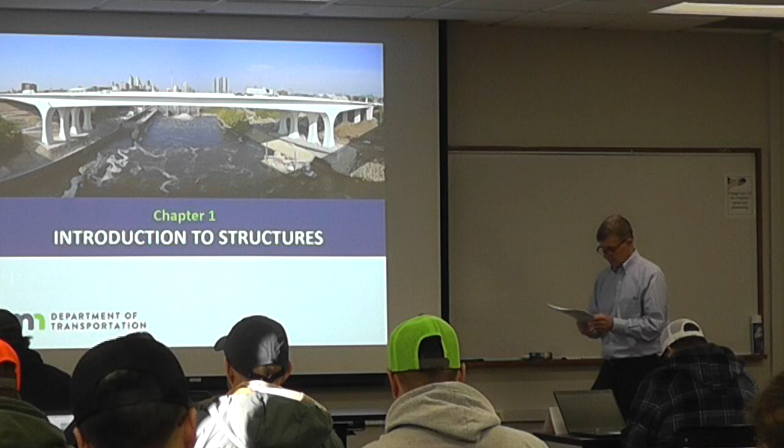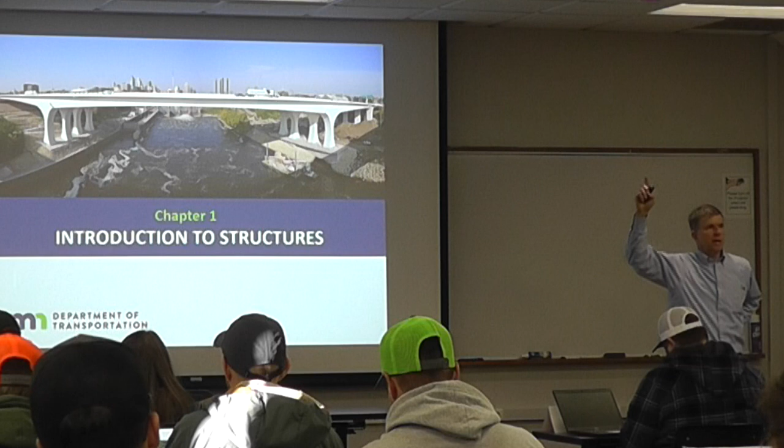Okay, so let's look at structures. So before we start going into here, who would give me a definition of a structure? Just throw anything out. There's all kinds of things that are right. What's a structure? Load-bearing component that's based on foundation? Load-bearing component based on foundation. We can probably write that up here for every class.

That's good. So it's bearing a load. It means it's carrying something. It's carrying a load. Another word for load might be weight. So we're looking at weight. We're building something that's going to carry weight from here to that, oftentimes over nothing or soft ground. There's bridges that are actually built on, we call them land bridges. They're essentially built over a swamp. Instead of digging out 50 feet of muck, build a low-level bridge right on top of the swamp.

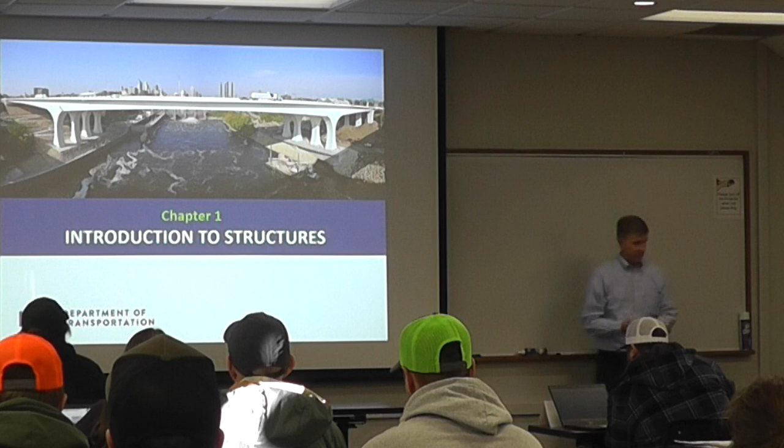So structures can be many different things. We're obviously going to concentrate on vehicular bridges here in this class, but structures also are things like carrying pipes, maybe a water main over a highway, or different things like that. Structures also are maybe tanks containing water. That's all structures. Structures are buildings. People live in them. So structures have many different definitions.

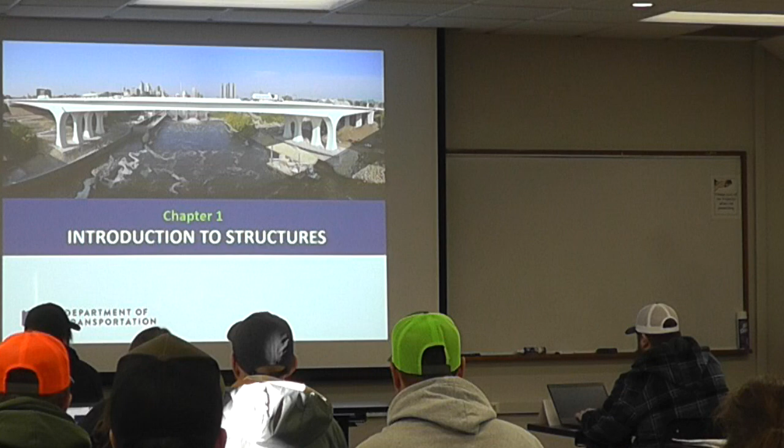Get this fixed, because there should be no way this thing goes to sleep in a 2-minute break. Just got to push enough buttons again.

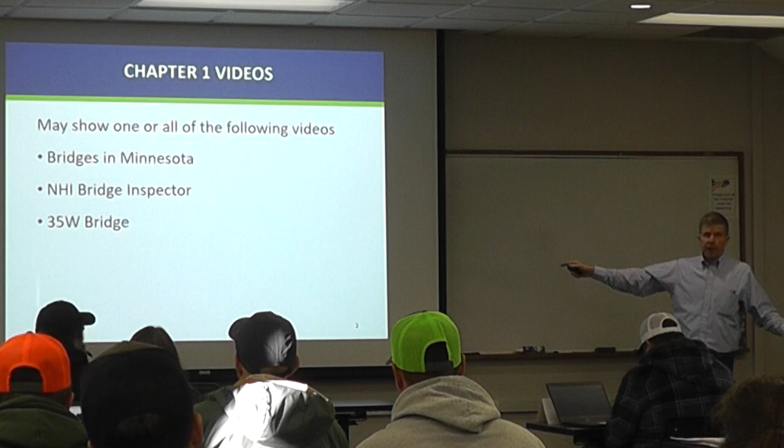There's several videos available on the Bridge Office website. We are going to show the next presentation after another morning break. We're going to show one on the 35W collapse and rebuild. We're also going to show videos on bridge deck construction. We're going to have some videos that Andy will share on bridge piling. A lot of times videos can help us learn, and so we're going to have a couple different ones.

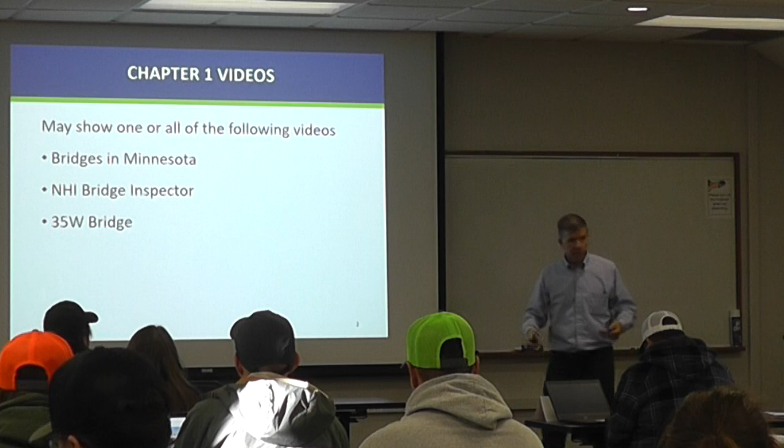In a 2-week time period, we're trying to make it so that there's a couple different learning things that you as students can go through. Some people are okay with learning the way we're doing right now. Other people learn better by watching a video. Other people would be better doing dialogue. And so we're going to have some of each. We're going to look in the bridge plan. Where do you find, what's the information you have?

So our agenda for this chapter 1 is looking at bridge types, elements, and spans. We're looking at some contract definitions of things like who's an engineer, who's an inspector, what do different things mean, what are the roles of each. We're going to look at some of the basics of bridge design, and we're going to look at design and construction loads.

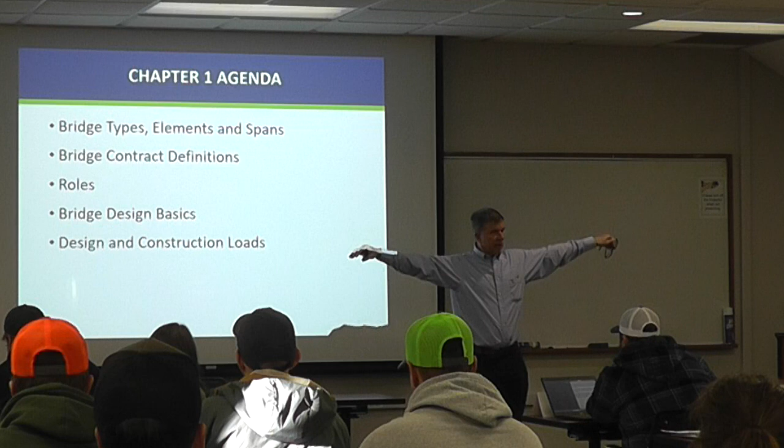And this lowest one here, design and construction loads: when we design a bridge, we're designing it so that it'll carry the vehicle, the loaded semi, the wind, the braking forces, whatever is on that bridge. But also, as you're building, you have to consider that. So the St. Croix Bridge, for instance, was built in cantilever construction. That means we started from a pier or a pylon, and we went out a segment at a time until eventually we were sitting out there 300 feet balancing. 600-foot span, 300 from each pier.

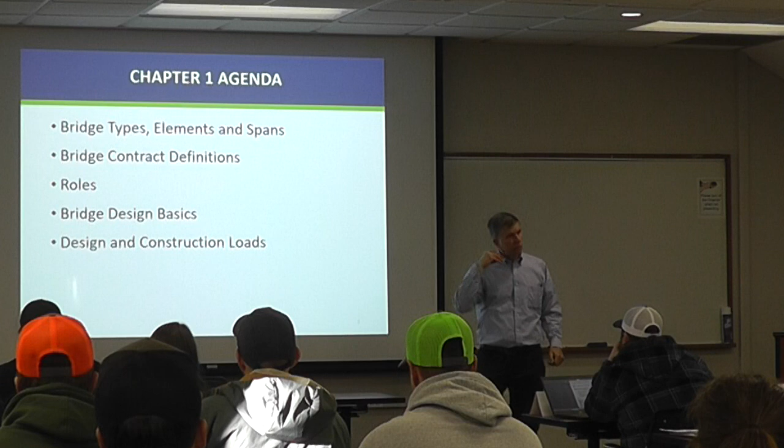That was actually the highest loads that that bridge will ever experience. Because once you tie it together, it becomes continuous and the load path changes. And so I also want you guys to be thinking about what is the load during construction? And as we're building forms and falsework, what kind of things do we need to be concerned about?

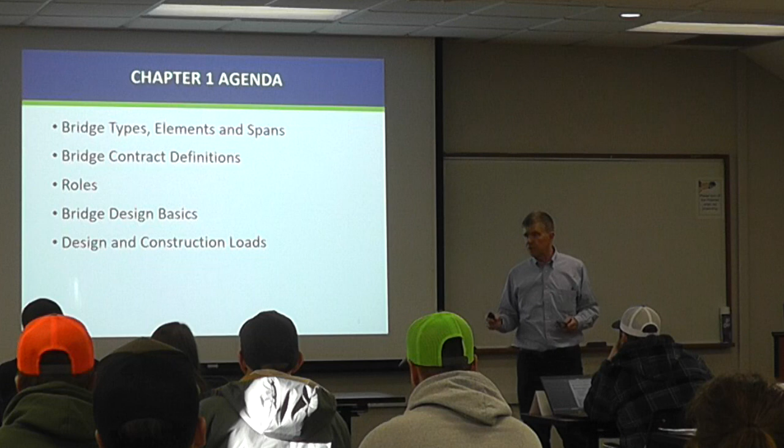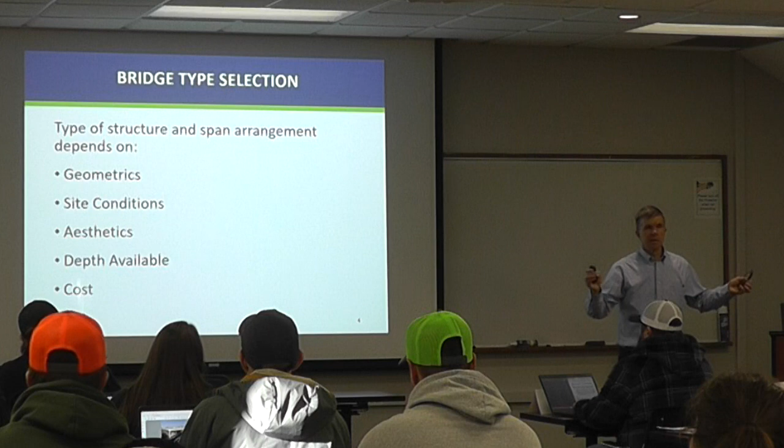So the type of structure and span arrangement depends on many different things: geometrics, site, aesthetics, depth available, and cost. If we're talking about geometrics, what kind of a geometric feature might make a difference in the type of bridge? So one way is straight or narrow. What's another geometric? A curve.

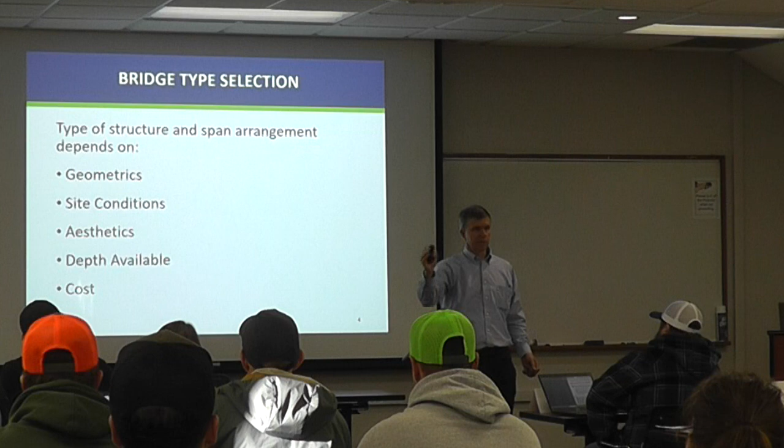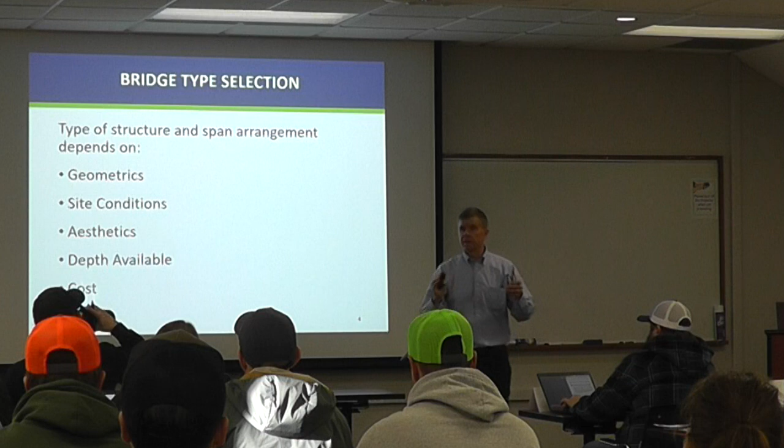Pre-stressed concrete girders can't be curved. They're straight lines. Steel girders can be curved. And so if you have a pretty tight curve, you're going to have a steel bridge. Now, if it's a gentle curve, and we've perhaps seen a lot of them, you vary that deck overhang a little bit. So maybe at the pier it's 3 feet, and out at the center of the span it's 1 foot. It can accommodate some curve. But if you have a real tight radius, you're not going to accommodate it. So you need to go to steel. So that's one thing for geometrics.

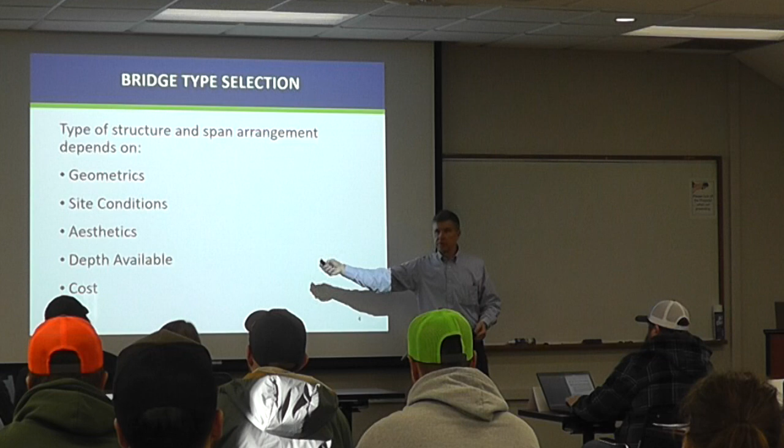Site conditions. You're over land, you're over water, you're over railroad. Maybe there's some access concerns. Maybe you've got to then make a longer span. And so that can depend on the site condition. Aesthetics. St. Croix, to use that as an example, was a thing where the concrete box girders are even different than a lot of them. And everything is rounded corners. You couldn't do that with a steel member so easily. And so, that all comes in.

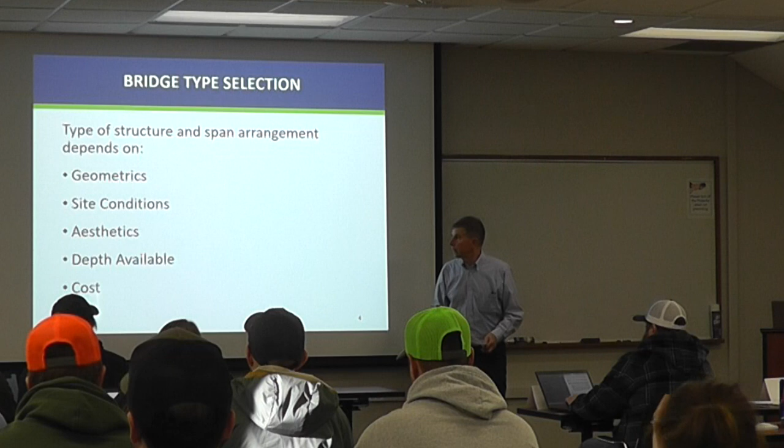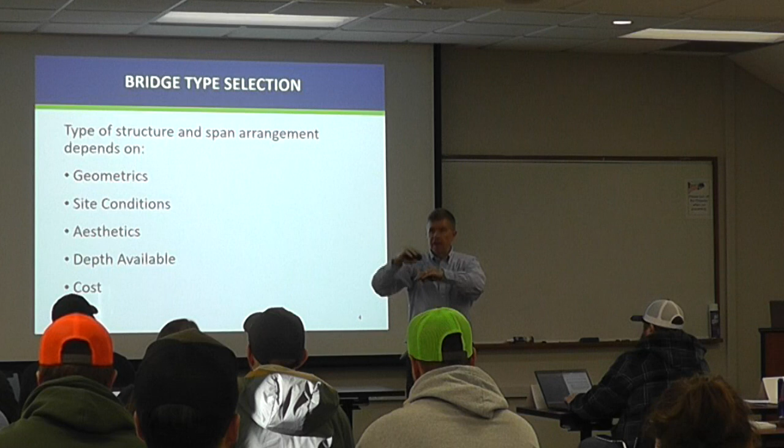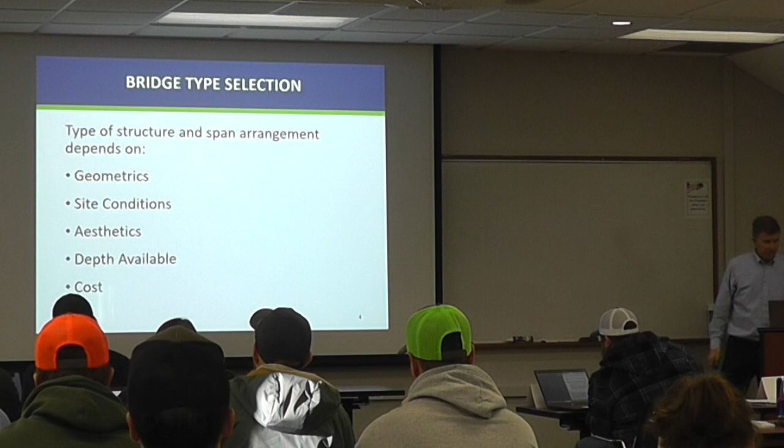Depth available. If you have a highway over highway, but you only have 20 feet to play with, you need 16'4" of vertical clearance. That means you only have, say, 3'8". Well, you're going to have probably a little skinny steel beam maybe instead of a deeper concrete beam. And so depth available matters, and obviously cost always matters. So those are all things that make a difference.

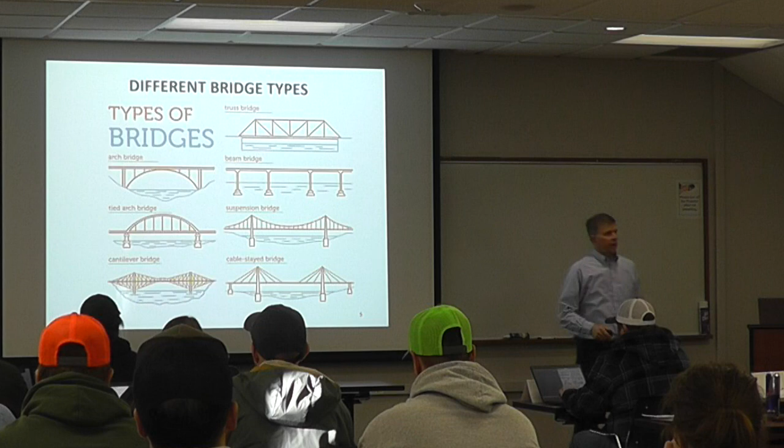Tied arch, so Hastings, those of you who have ever been down in Hastings, the new Highway 61 bridge, it's this method. A suspension bridge is one where there's some taller towers, and then there are cables supporting it with some hangers. Cantilever bridge, this is an old picture, a diagram of the Forth Bridge in Scotland. Cable stay, the towers come higher, the cables come down. Right now, preliminary engineering for the new Blatnik replacement is looking at a cable stay bridge and a tied arch bridge for the main channel. So there are a lot of different examples here of type of bridges that we have.

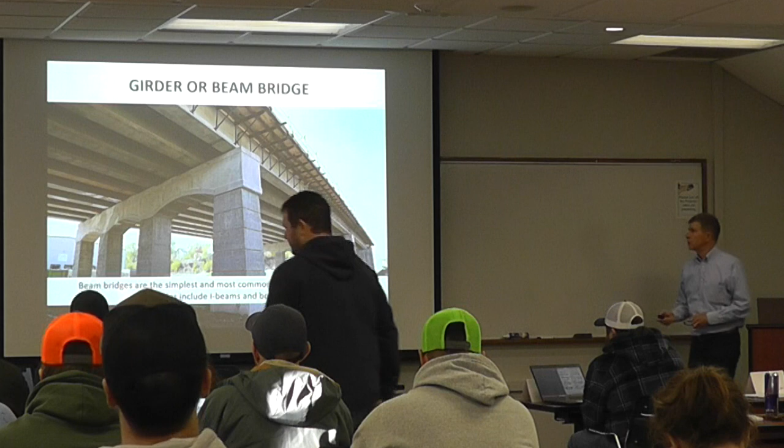So pictorially, here is a picture of a girder or a beam bridge. So the girders are going along here from pier to pier. So in this case, it's a concrete girder. And also, I'll just mention this terminology, girder or beam. Is there a difference? They're pretty interchangeable. If it's a system that has girders with floor beams tying in, then it's a little different terminology. The girders are the main elements. But oftentimes we may hear pre-stressed girders, and by the same token, we can hear pre-stressed beams. So it's not any marked difference there.

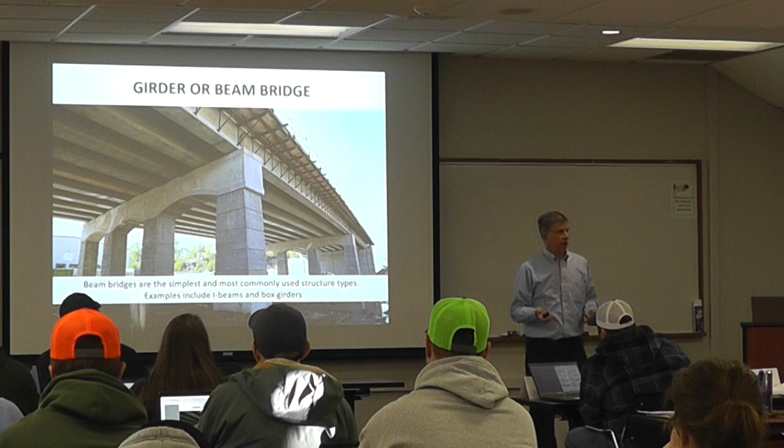Beam bridges are the simplest, most commonly used structure type. They are what we use. As far as material, I don't remember if I have it in this slide. Pre-stressed concrete that looks like this right now is roughly 80% of the bridges that MnDOT puts up in a new configuration. That leaves 20% for steel or perhaps a few others. In the MnDOT system, they really don't build much timber, but 80% is roughly pre-stressed concrete.

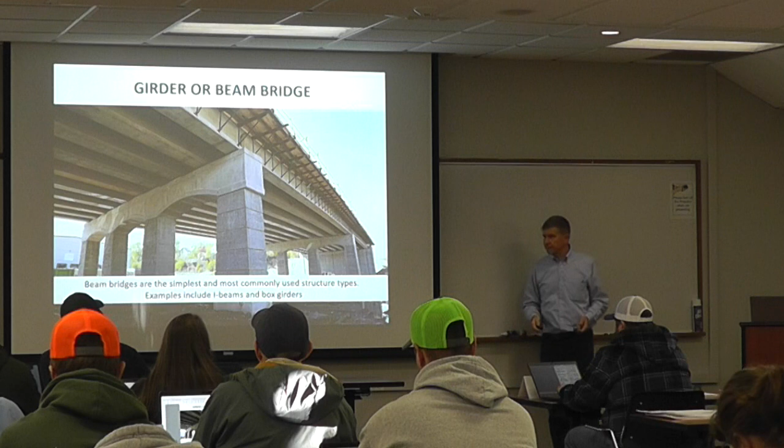So here's another picture, just a simple basic bridge over a stream, a couple of piers, one on either side of the channel, river, and then abutment up on the slope. Little pre-stressed girders or beams that are coming across with a concrete railing and a concrete deck. So again, very, very standard type of bridge that we would see here.

Beams are limited by their standard depths and shape. There's a little diagram in the bridge design manual that shows if we have a 50-foot span, what depth of beam would we need, depth being this dimension. If we go to 100 feet, obviously it takes a little bit stronger of a beam, a little deeper, and so there's also a chart that would tell that. These pre-stressed beams can get up close to 200 feet, around 180, some of the deeper sections.

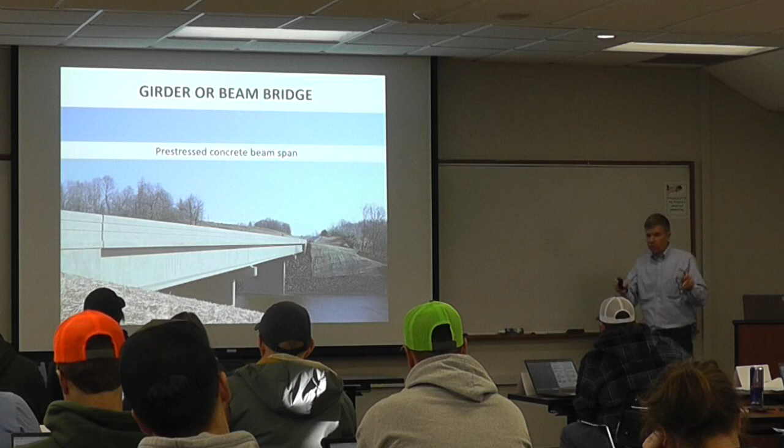And you can always stack a few beams a little bit closer to each other. We'll look at some of that when we get into the 27-138 bridge.

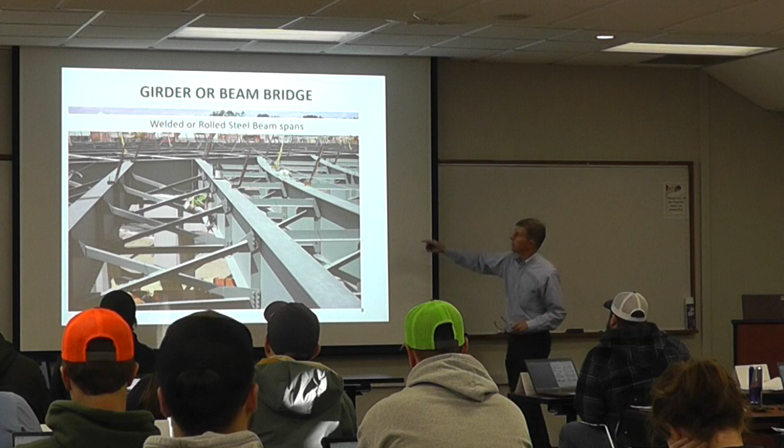This is a picture of one of the single point interchanges that we have in MnDOT. I think this is the Penn Avenue. Single point interchanges, the ramps come in and everybody is kind of crossing at the same place. There's a traffic light, stop the ramps, and then the ramps go. But in a configuration like this, there's no way pre-stressed girders would work.

But steel, you can frame steel into another member. So in this case, there's a girder going all the way from here, going across, and then all these little curved ones are coming in and framing in. So this is something that steel can accommodate. With pre-stress, you'd never be able to do that.

So here's just a picture of, in this case, a welded plate girder. Welded plate girders simply mean that there is a top flange, a bottom flange, and then a web. The web is this vertical piece. They're welded together in a fabrication shop, and then they come out to the site.

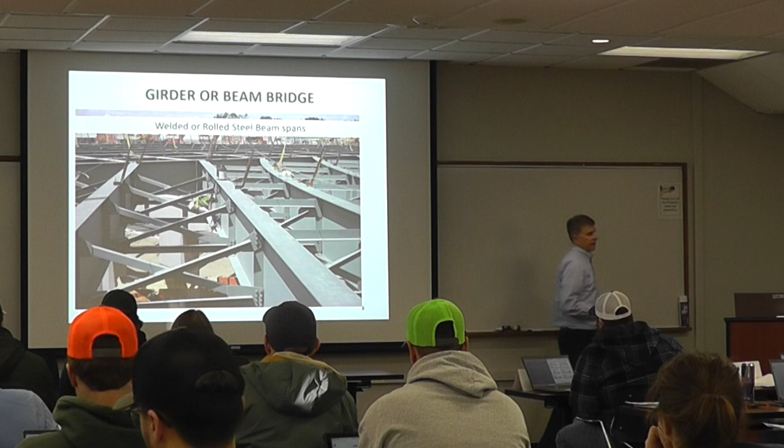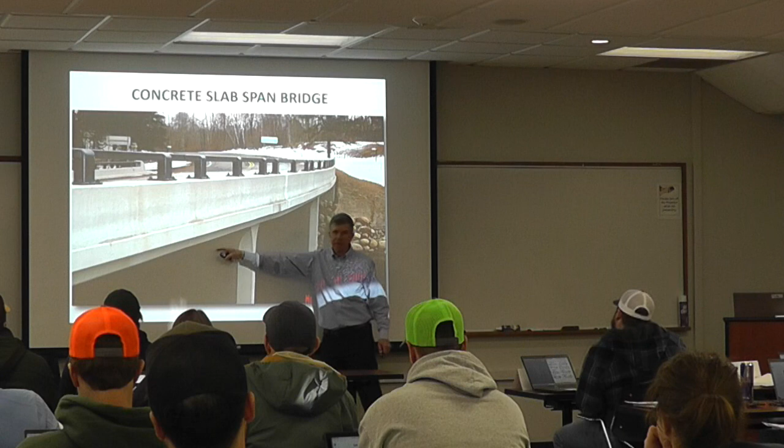They also do have the smaller beams, up to 36 inches, which are what they call rolled steel, and they come out of the rolling mill in the final configuration. So you might see both of those. Concrete slab span does not have a separate beam, but the slab gets a little bit thicker. Typically they would be 16, 18, 20, maybe 24 inches thick.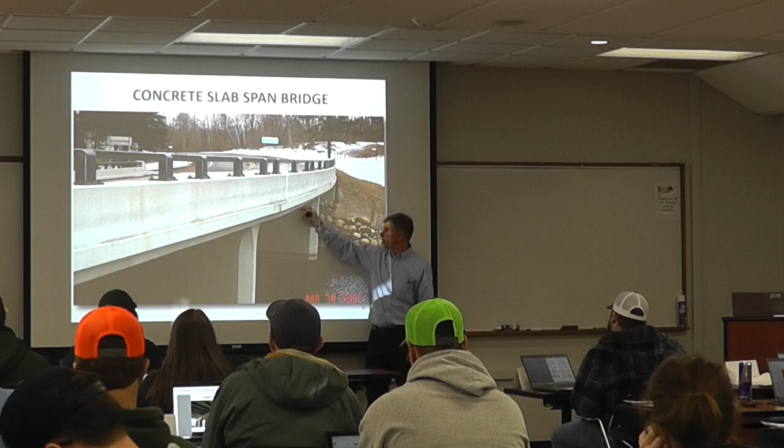The one thing, it's going to require more false work as you're constructing. Whereas a beam bridge, you build the piers, you put a beam across, and then you just have decking. But for a slab, you'd have to support it all the way across. So we're going to have a full session on forms and false work, and we'll talk about that a little bit more.

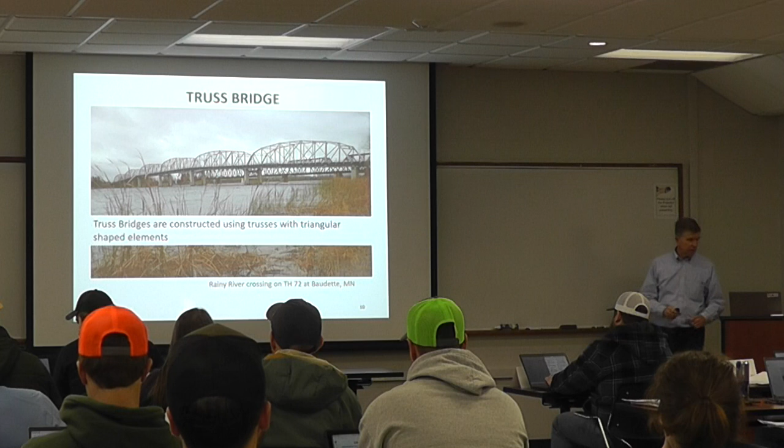Truss bridges always have triangular shaped elements. And their elements are always either just tension or just compression. Who can tell me what is a tension member? What is tension? What's it trying to do to the material? Trying to push it together or pull it apart? Tension is trying to pull it apart. Compression is trying to push it together.

We're going to talk more, I'll just briefly mention it here. Reinforced concrete combines concrete, which is strong in compression, with steel reinforcement bar, which is strong in tension. You put them together in a bending moment, and the reinforcement will take your tensile stresses. Your concrete will take your compression stresses.

These kind of bridges are all steel. It could be a concrete deck, but as far as the structural members, they're all steel. They're all in triangular patterns, and all of the loads will go such that each member is just in tension or in compression. And so that is how a truss works.

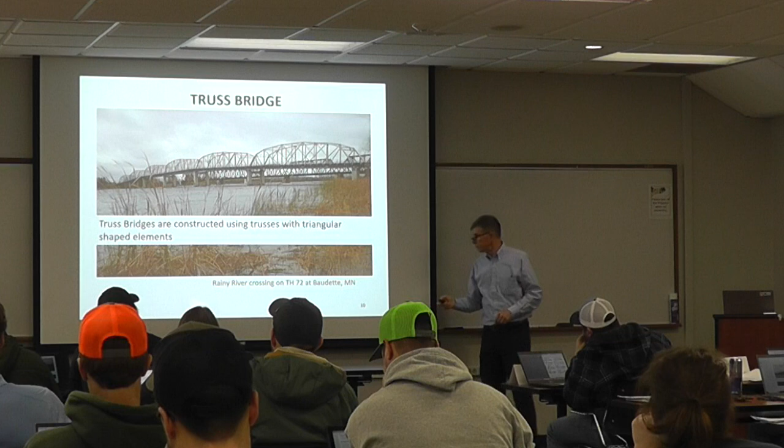So this is a picture of the Baudette bridge. Part of the problem with truss bridges is they have these portals that are sometimes fairly low above the roadway, and they get hit by high loads. So one of my jobs as Metro Region engineer was, it seemed like every couple times a year even, to go visit the Stillwater Lift Bridge, because high loads would come and damage a portal or one of the verticals or something.

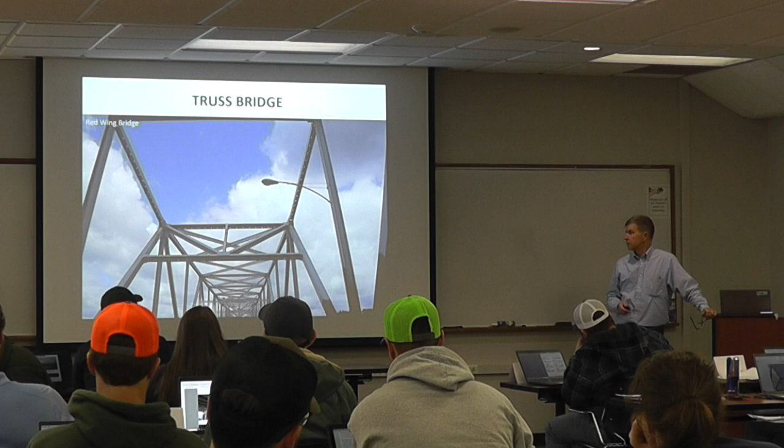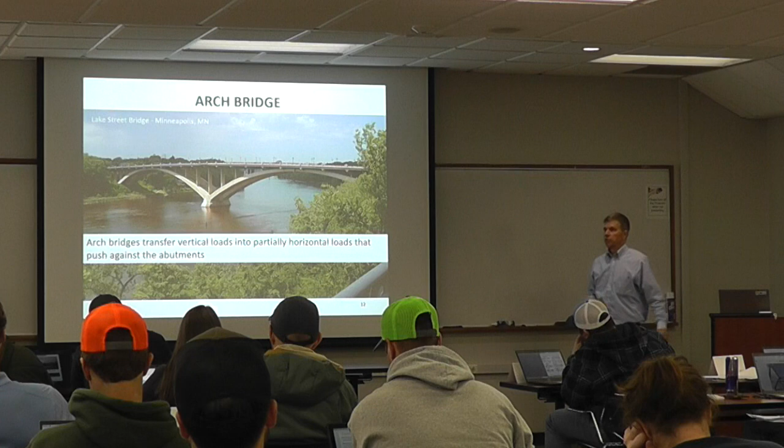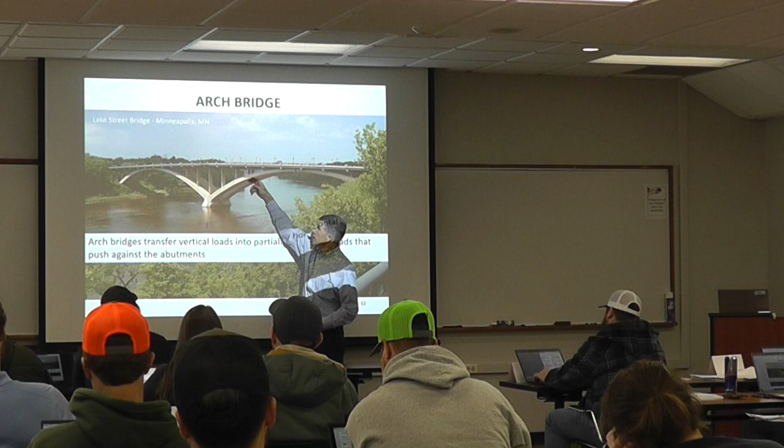So arch bridges transfer vertical loads into partially horizontal loads that push against the abutment. So without getting in too deep into statics, you get a load coming down here, it's a vertical load, but it's going to distribute because of the shape. Some will go horizontal, some load will stay vertical, and it'll keep working its way down.

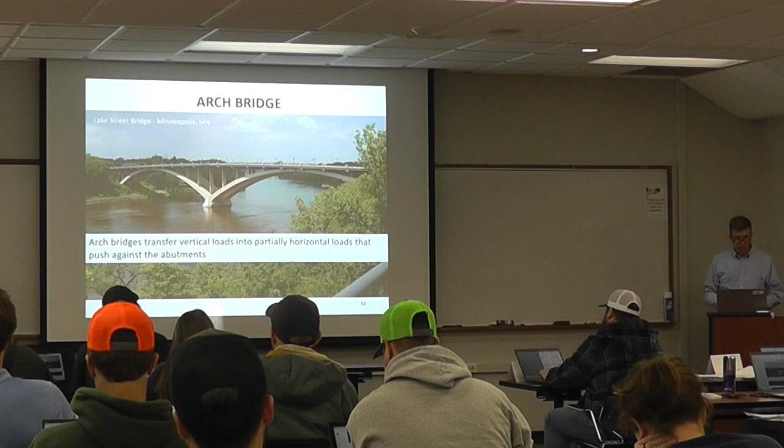But eventually, it is trying to push laterally. So those foundations have to be pretty stout to be able to resist those types of loads. So that's an arch bridge. That's the Lake Street Bridge in Minneapolis.

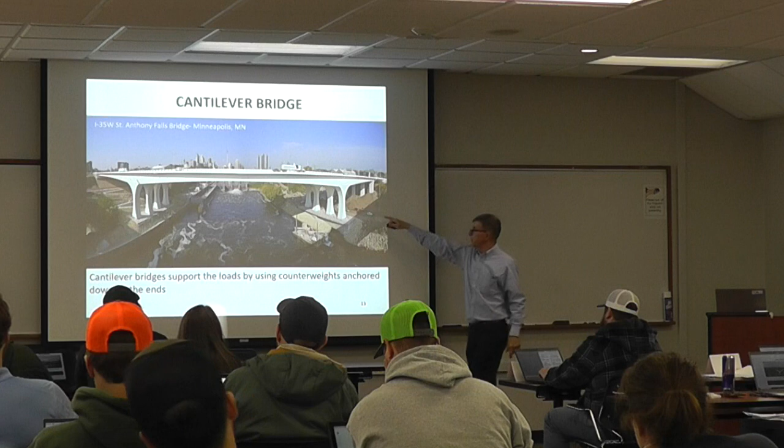Cantilever bridge, I mentioned St. Croix, we were about 300 feet each way. Likewise, the 35W, that we'll see a video of after break, they actually built this back span first. There was false work down here, and they built all this. So essentially it's like a big counterweight.

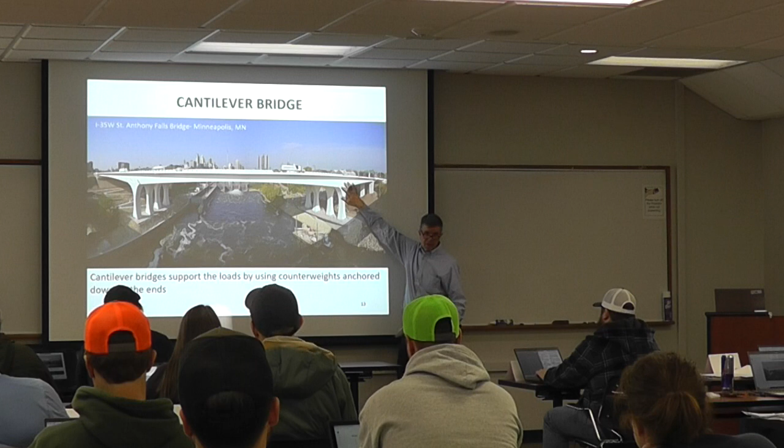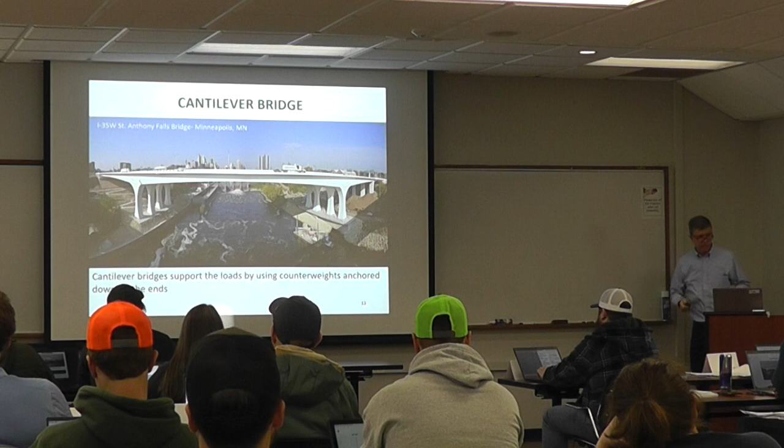And then each one of these segments was placed day after day after day. And it went out until they got out to the middle, and then they put it together. But each of these segments had to be tied back with post-tensioning to what had already been cast. So that's called a cantilever during construction, and it's a cantilever bridge in that way.

A cable stay bridge. So the picture for Minnesota is the Greenway Trail over Highway 55.

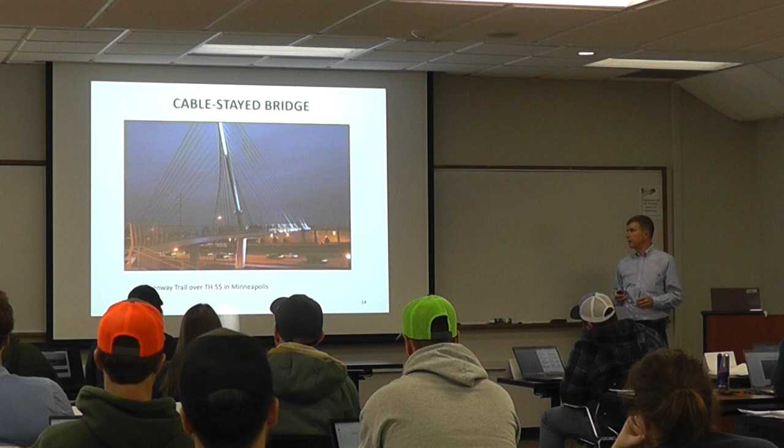They've recently had some issues with some of the connector brackets and stuff, I believe both up here and down here, for sure up at the tower. And so there's been cracking and stuff that they've had to figure out. But other more famous examples would be things like the Sunshine Skyway Bridge in Florida and so forth. So those are all the types of cable stay bridges.

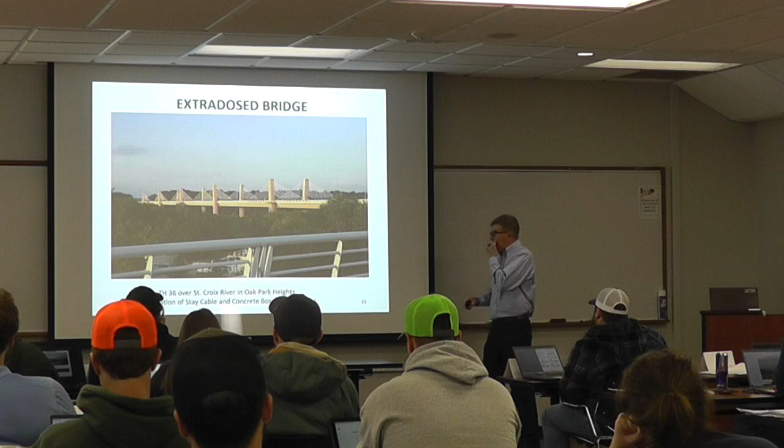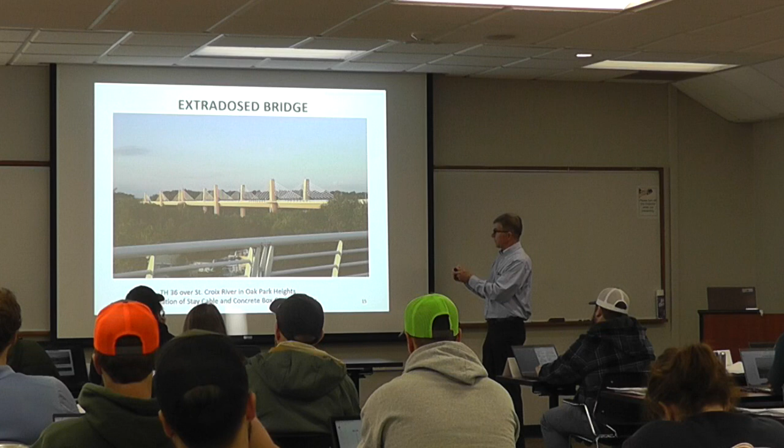Extradosed bridge, I hadn't heard this term really until I started working on the St. Croix project. But this is kind of a combination between a cable stay and just a conventional box girder. If this was a cable stay bridge, these towers would be much taller. These were 65 feet tall; we'd probably be at least 200, maybe more. But we would also then eliminate at least one of these. These were 600-foot spans, so a true cable stay would probably be at least a 1,200-foot span, or could be that much. Blatnik right now is looking at about a 750-foot span for a cable stay.

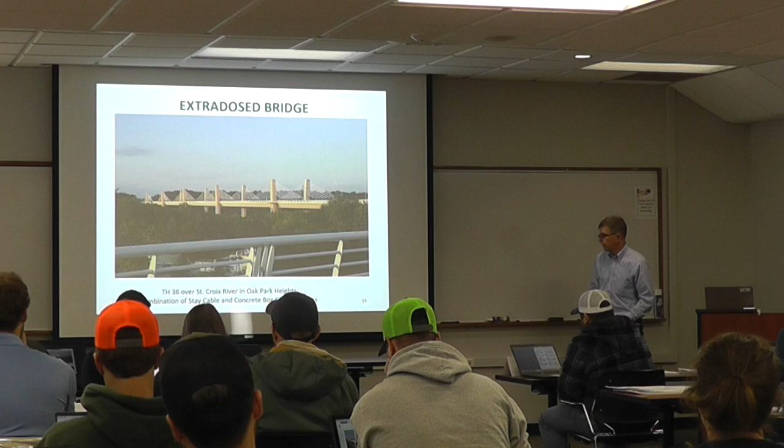But an extradosed bridge utilizes post-tensioning. These are post-tensioning strands. There's also a lot of post-tensioning that runs in the box. But essentially it enables you to have less post-tensioning in the box itself. So a combination of stay cable and concrete box girder design.

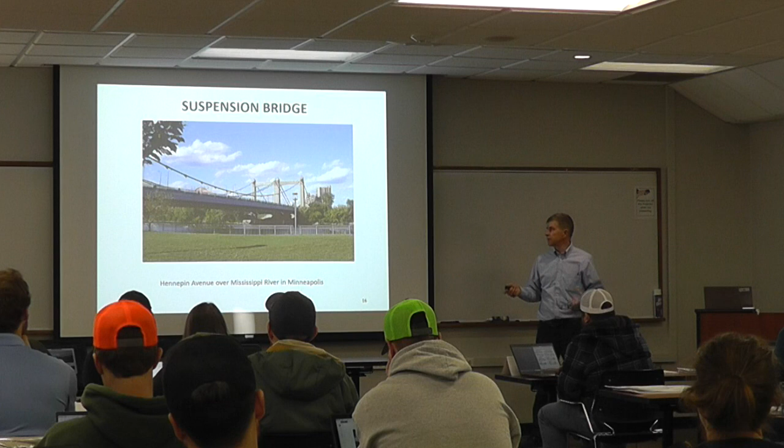Suspension bridge: in Minneapolis, we have the Hennepin Avenue Bridge. And it's a shorter span. It was made as a suspension bridge to replicate what was out there originally back in the late 1800s, early 1900s. And so they can go much longer than that Hennepin Avenue suspension bridge is.

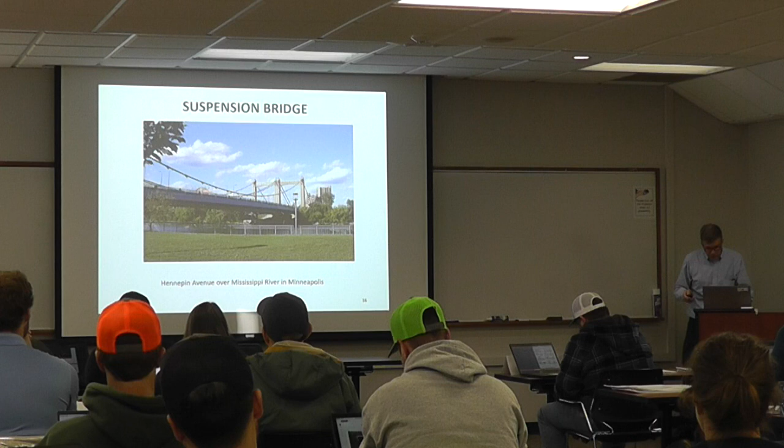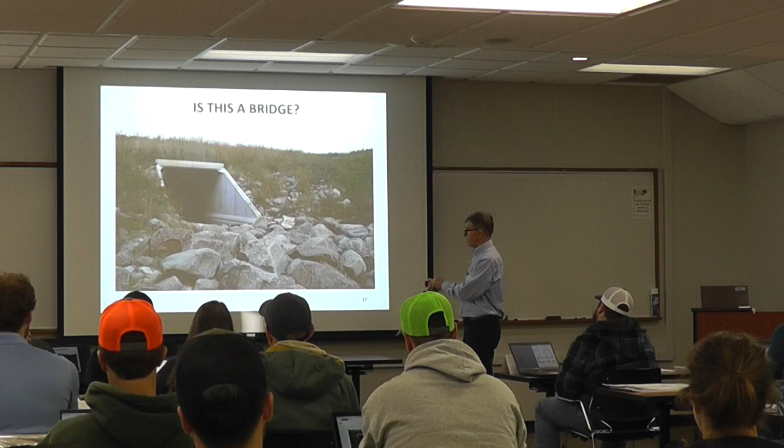Also, if we had, say, a 6-foot box with less than a 3-foot gap between and then another 6-foot box, that would also be a bridge. And so that is the definition that we have. So in Minnesota, culverts that measure over 10 feet horizontally on the center line are considered bridges.

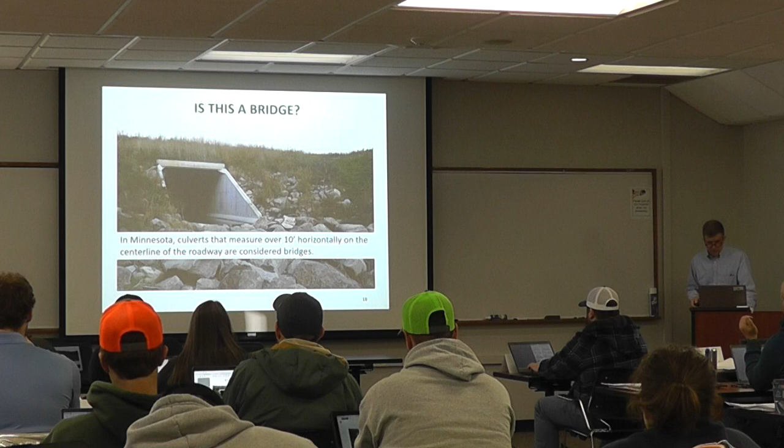Substructure versus superstructure. The superstructure is the part that vehicles drive on, the part that gets the loads from one substructure to the other. So the superstructure is the part above any of these big concrete elements. The substructure is the piece that's down here.

We'll see some more terminology, but among the things in the superstructure is the deck. It's also going to be the barrier or the railing. It's also going to be the beams or the girders. And these little guys here are the bearings. They're kind of in no man's land, but we do consider them to be part of the superstructure, and it's part of what is shown here.

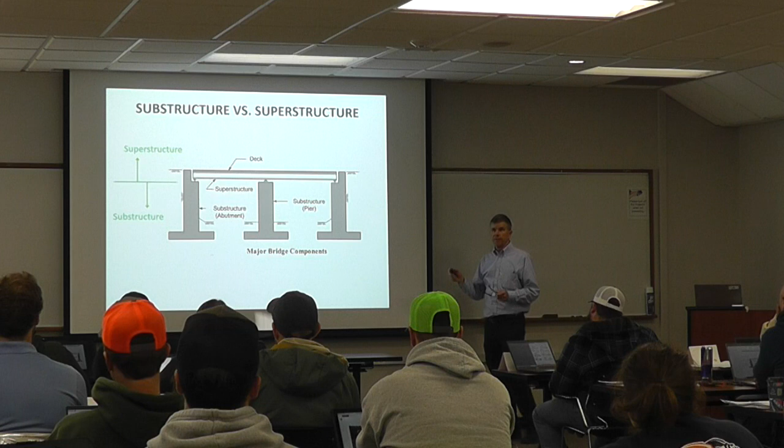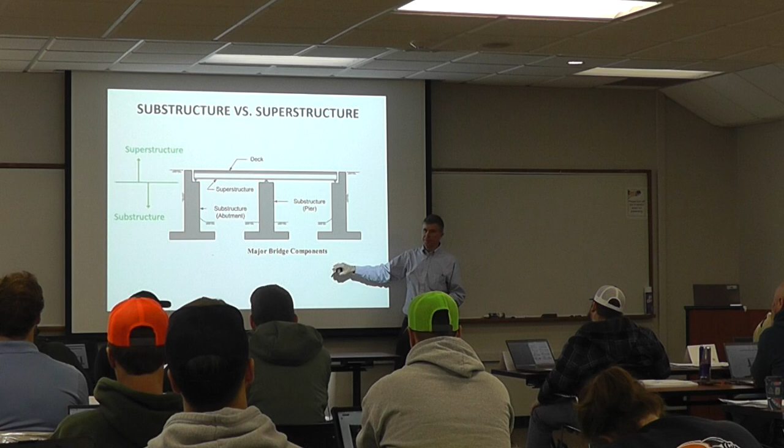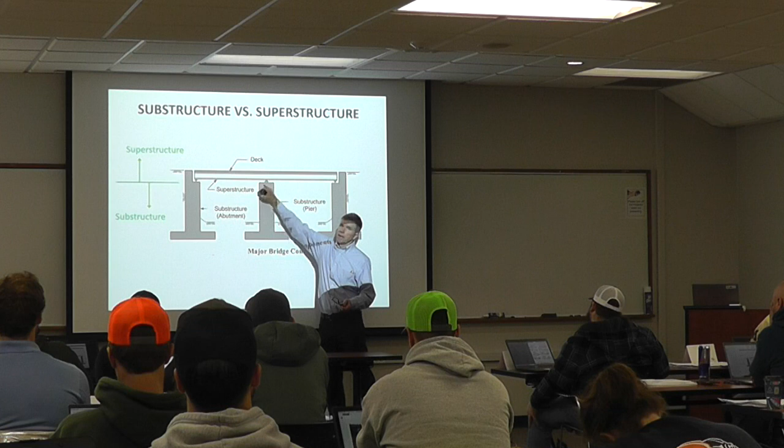The substructure then are the parts that carry the loads from the beams down eventually into the ground. So in this type of a diagram, this is the abutment, this is the pier. It's also going to include the footing. So all substructure will have some type of a footing, and a lot of times we'll have some piling that will come down. For say a pier, you might not have any footing, you might not have any concrete stem, you might just have a steel pile that comes up here, and then some kind of a cap that ties to it. So all of those are substructure elements.

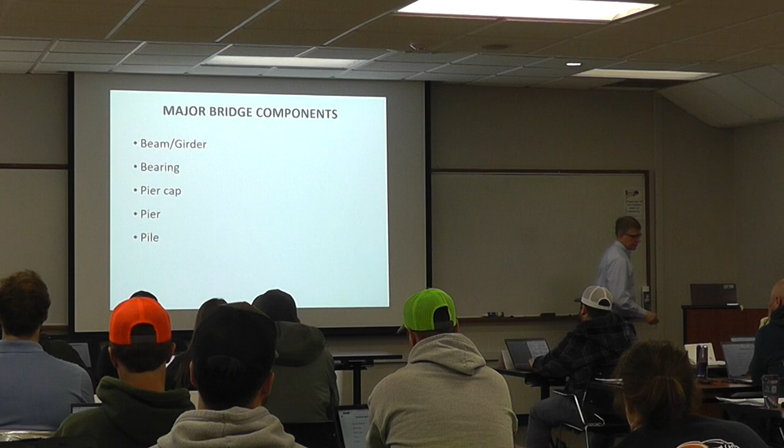So these are some of the major components. I've mentioned them already. Beams and girders, those are part of the superstructure. Bearings are part of the superstructure. Pier cap is part of the substructure. Pier is part of the substructure. Pile is part of the substructure. So terminology to keep in mind as we go.

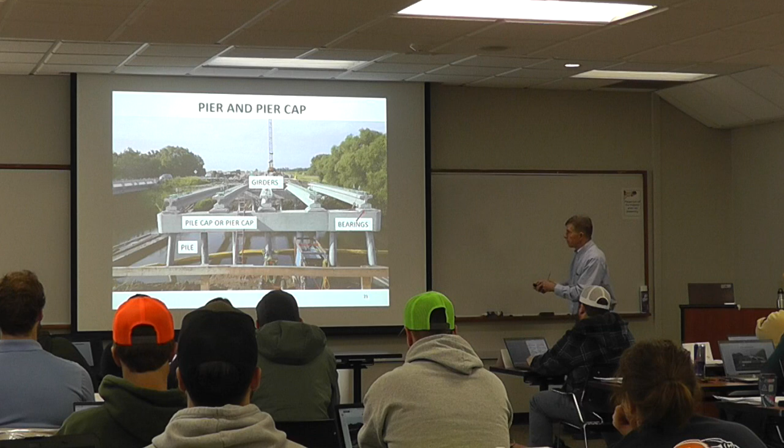Pictorially, the girders here are, in this case, pre-stressed concrete. And they're going to go from pier to pier. We also have then a pier cap, or sometimes it's called a pile cap. So it's this concrete element that's going across. So that is going to then share the load coming down through the deck, through the beams, through the bearings, and it'll go on.

One of the things we always want to look for and think about is what is the load path? And this might be just a good place to point out that if we have a deck up here and we have, say, a semi up in the middle, the loads will come through the deck to the beam.

Some of that load is going to say, well, I'm going to come over to this side. Other load will go to that side. The load that comes here is going to come down through here, and that's going to distribute through this concrete member, through the pier cap. Some of the load will come down to this pile, other load will come down to this pile. And so all of the stuff that we're building has a purpose to share the load and distribute the load into a certain place.

And so load path, load transfer is a big thing in structural engineering, and understanding what it means will really help you out. This is what we call an elevation view. An elevation view is looking at the side of a bridge. And the elevation view here is looking at beams. We're looking at damage of beams. We're looking at a pier cap. Over here, we're looking at piles, the piles that are controlling that load.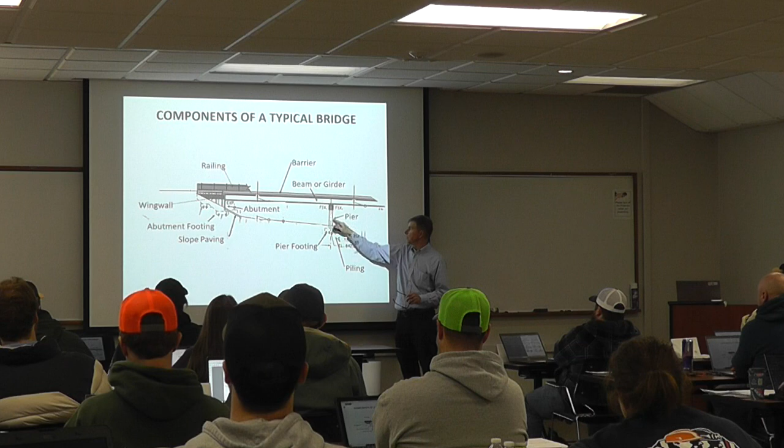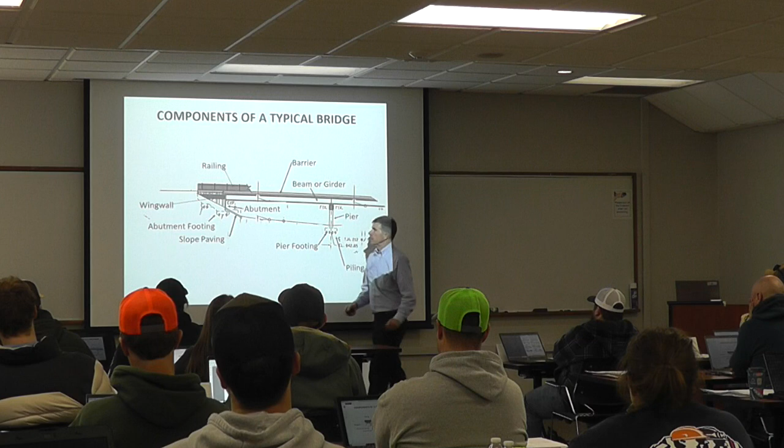So the pier footing is the box down here. The pier, in this case, would be a column plus whatever kind of a cap. The beams and the girders are these parts that are going across here. The abutment, in this case, a footing up on the fill, and then the abutment over there. A wing wall is this portion that goes back from the abutment, and it's going to withhold the dirt fill that's back behind the abutment.

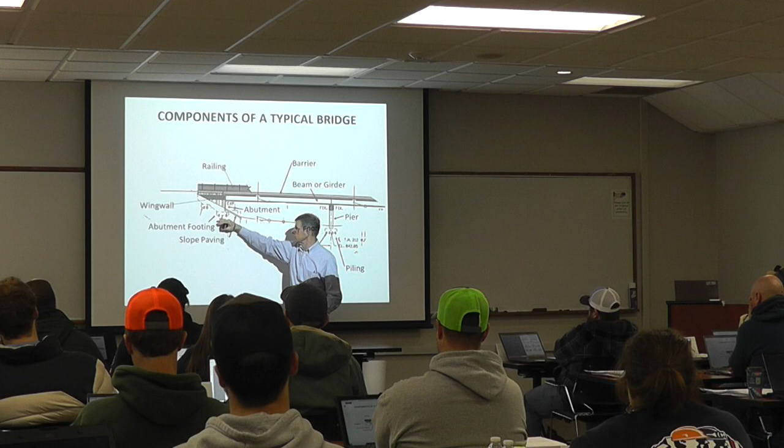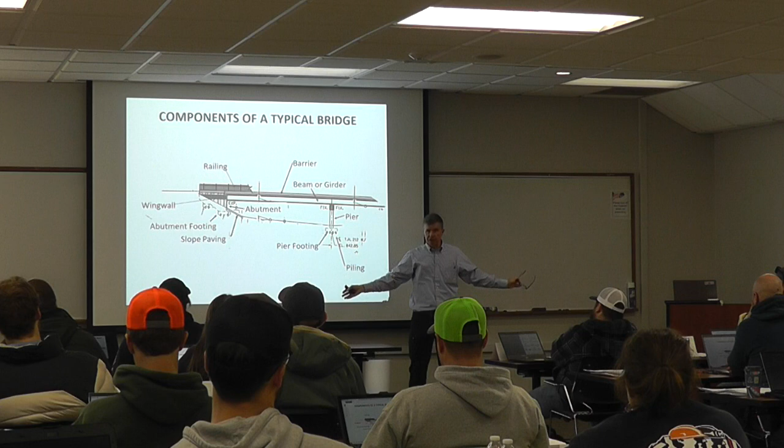So oftentimes these abutments, especially if they go down to this level of the roadway, have at least 20 feet of fill. And you can imagine if you didn't have a wing wall, how would you hold up that fill? You could hold it right immediately at the abutment, but it would just keep spilling out the sides. And so the wing wall retains that. Sometimes the wing walls go parallel, sometimes they go back at 45, sometimes maybe you're attaching to a retaining wall along the roadway, so they might come out essentially parallel to the road.

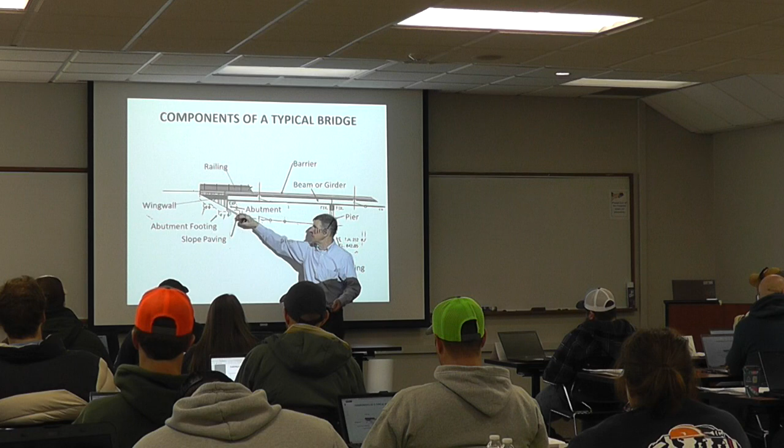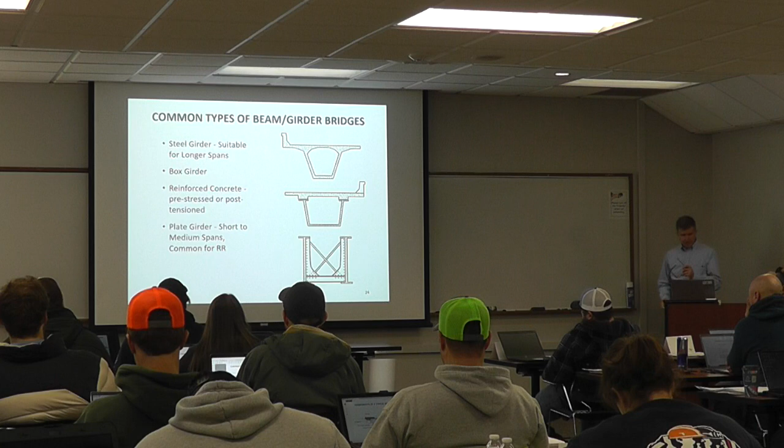Slope paving, we're going to learn about slope paving and how we construct that. Its purpose is to make sure you don't have erosion coming down underneath. So some common types of beams or girders. Steel girders are suitable for longer spans. The steel can get up to 300 feet, especially if you haunch.

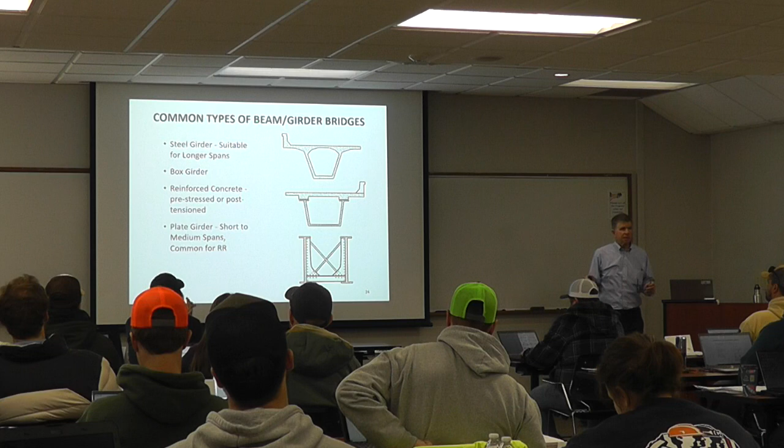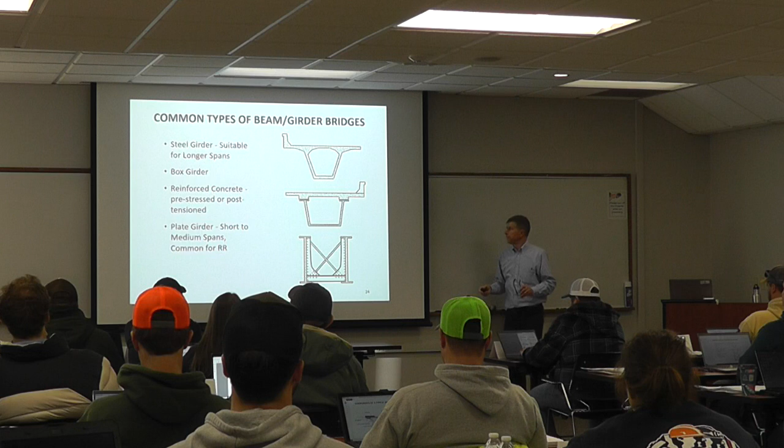Box girders, so steel can be put into a box type shape. This case is showing a steel box with a concrete deck on the top. The top one is showing a concrete box. Concrete boxes have a good ability to be formed into curves, into different geometric things, so they become pretty valuable that way. And then plate girders can be more stout, like railroad bridges will often have this kind of configuration, maybe some heavier diaphragms going in there.

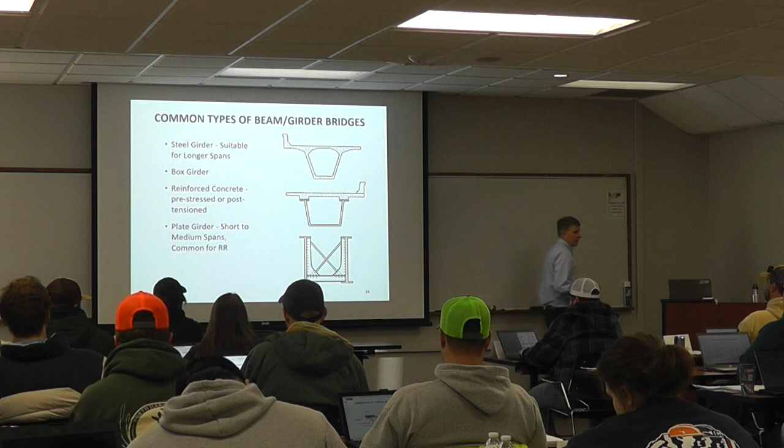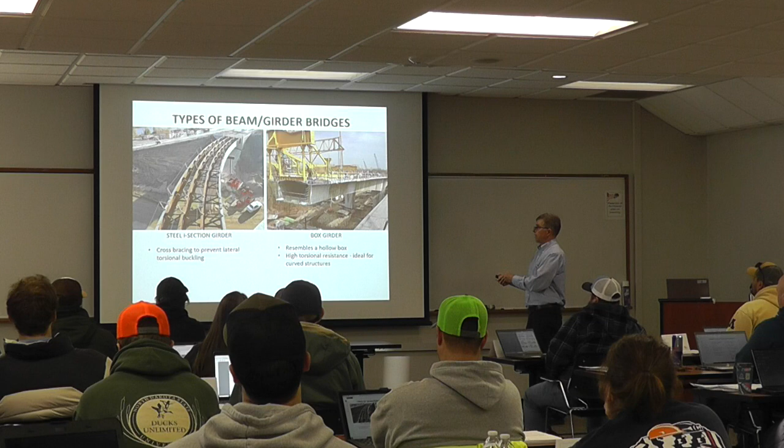More pictures of steel on the left. Oftentimes they will require a shoring tower at a certain location. So as the designer makes a plan, they will say, well, where's my splice locations? You have to support my girder at such and such a location, at elevation, before you put the next one on. If you don't, then you can get some weird geometrics in there.

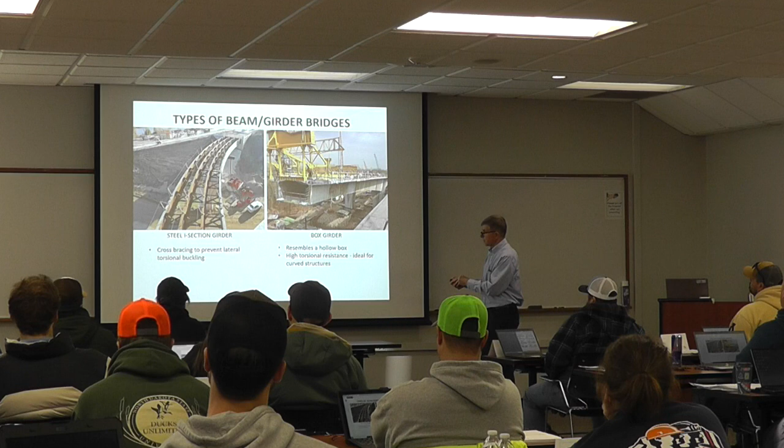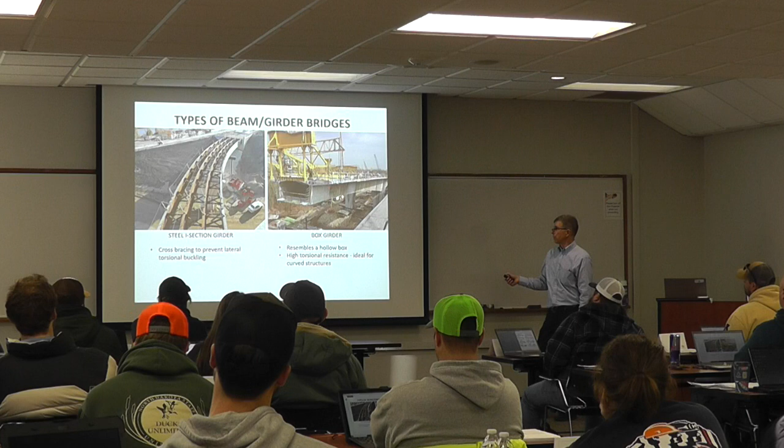So there's always going to be these little things you see as X's in here. They're called diaphragms, and they will tie all of those pieces together. If it was just one single girder, it would be very unstable. You'd get a curved situation like that. But you tie all these together with these X braces, and they become much more stable. This is a concrete box girder. This is cast in place, we can tell by the rebar that's sticking out of the end. And so there's forms that come along, and then they form it up and put rebar and